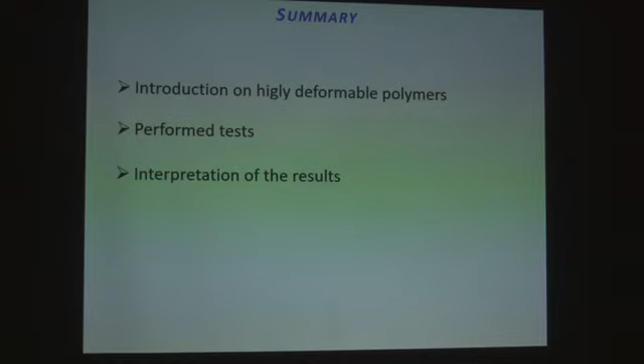In our research, we have studied the fracture toughness of highly deformable polymeric materials. A brief summary: I start with an introduction on highly deformable polymers, then the performed tests and the interpretation of the results. As we know, highly deformable materials have a high fracture toughness due to their great deformability.

In this research, we present the results of some experimental tests performed on specimens made of a common silicone-based polymer. This material is adopted in several industrial applications, like biomedical, but it was chosen because it represents a class of material.

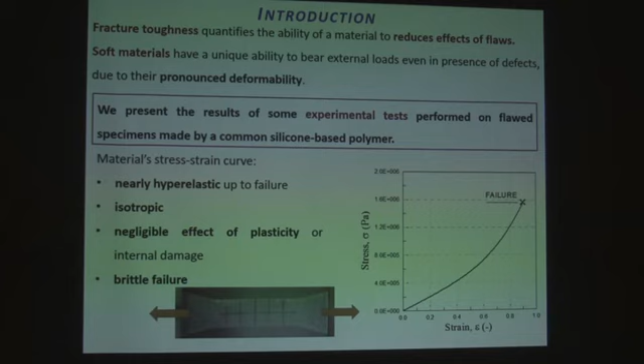The material, before the other tests, was characterized by a simple traction test that showed the elastic behavior, which is nearly hyperelastic up to failure, with an increasing of the stiffness with the increasing of strain. The material is isotropic, and the effect of plasticity or internal damage is negligible. The failure is brittle.

As we know, the crystalline material has an enthalpic elasticity, so the elasticity is ruled by the internal energy of the crystal. A polymer is made of a network of long molecular chains linked together, and the mechanical behavior is ruled by the entropy. In this general equation, the internal potential energy is related to the entropy variation and the temperature. So, the polymer network is always in a state of thermodynamic equilibrium. For example, this is the constitutive equation derived from this one for a neo-Hookean medium.

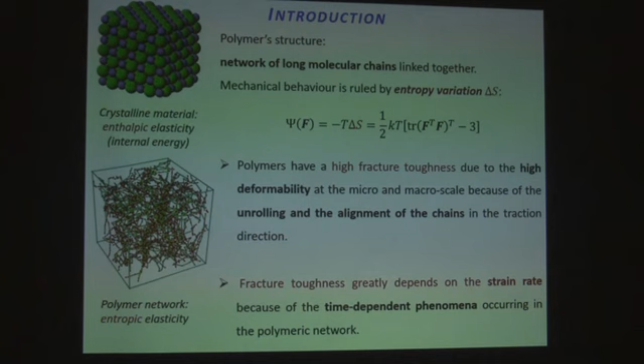Polymers have a high fracture toughness due to the high deformability, because the chains are rolled together. The elasticity is due to the unrolling of the chains with a subsequent alignment in the traction direction. This process takes time, and so the fracture toughness depends on the strain rate, because this process is a time-dependent phenomenon.

Failure of the polymer can be interpreted with the so-called cavitation criterion. Following this criterion, we assume the presence of intrinsic microspherical voids embedded into the material, and the voids are subjected to an internal pressure equal to the hydrostatic stress at the same point of the material. The failure occurs when a critical value of this pressure is attained. When this criterion is fulfilled, we have an unstable inflation of the void, causing a brittle failure.

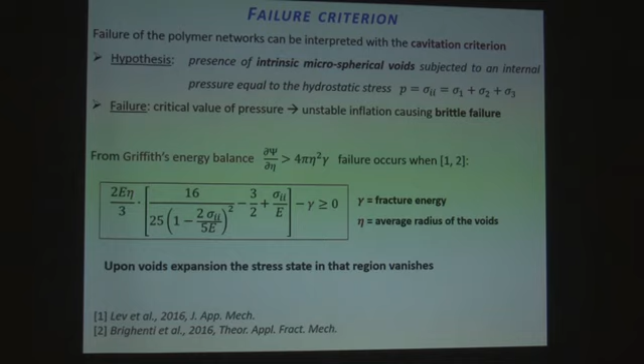The criterion can be written in this way, where it depends only on the fracture energy, the average size of the void, and the hydrostatic pressure. When the void is expanding, the stress state in the region vanishes completely.

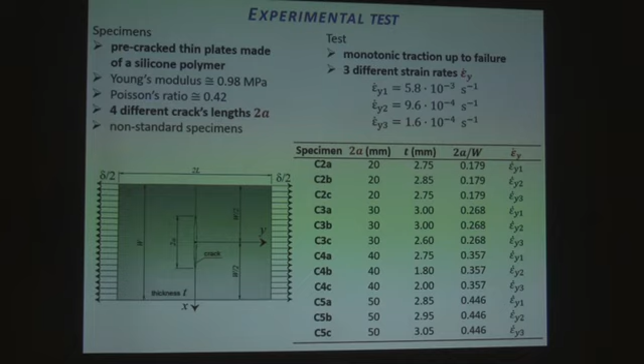The experimental tests we have performed were on these non-standard specimens. The specimens were pre-cracked thin plates made of this silicone polymer. We tested 4 different crack lengths and 3 different strain rates. This is the complete table of the tests. During the test, we observed in the thin plate the out-of-plane displacement of the regions above the crack, as Professor Bolzoni showed yesterday.

This phenomenon is due to the instability closure of the transversally compressed zones. And we can also observe the blunting of the original crack tip, and the blunting becomes more evident decreasing the strain rate. Also, four new crack tips, or directions of the tip, appear during the load process. The observed failure mechanism is brittle.

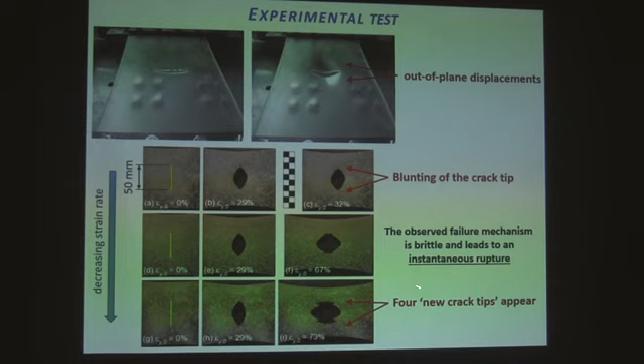These are several Green-Lagrange strain maps obtained from digital image correlation for the 20 mm and the 50 mm crack at two strain rates. We can observe the gradual magnification of the stress in a region, not only near the crack tip, but in the region. And these are the crack paths highlighted after the complete rupture of the specimens.

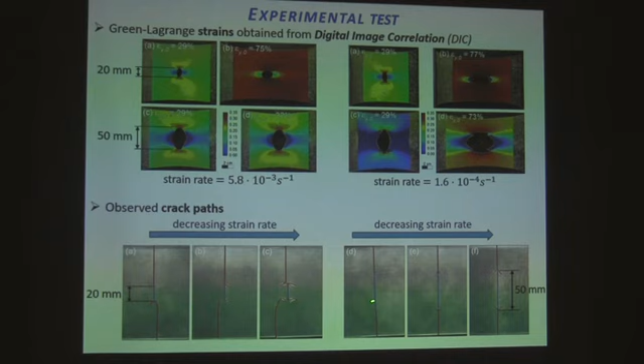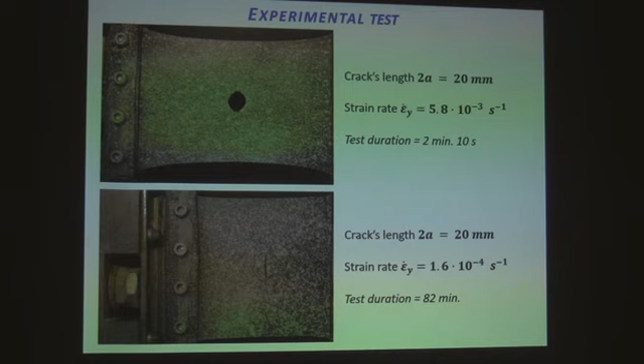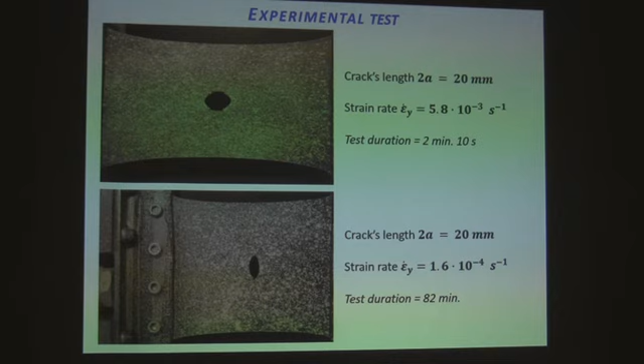We can see that for an increasing strain rate, the crack path is not perfectly straight, but has an initial curve. So in this case we are in a mixed mode, and in this case a pure mode 1. Here we have two videos only for showing the advance of the test. You see the blunting of the tip and the 4 new tips. And in this case, which is the slowest, you see the same phenomena.

I'm sorry for the motion of the camera. I'm not a great camera operator.

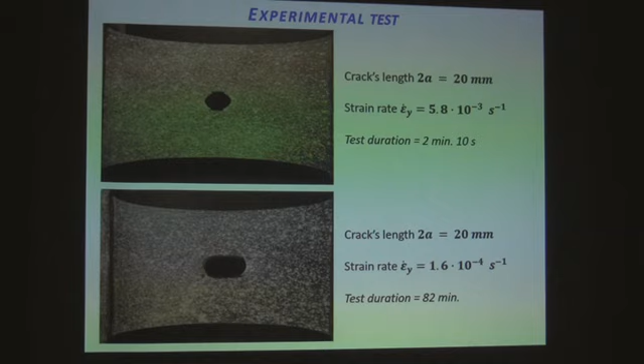At the end you see the great deformation. This one is the fastest test, and this one the slowest. We can see that the failure starts from this point.

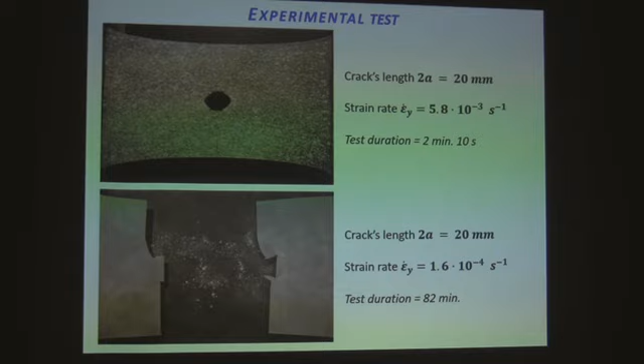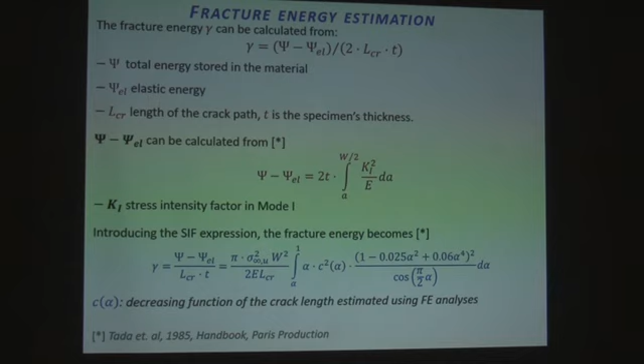The fracture energy of the specimen can be calculated from this simple expression, in which at the numerator we have the total energy spent for the rupture, and at the denominator the total crack area. This term can be calculated from this simple expression, in which only the stress intensity factor in mode 1 appears. Introducing the stress intensity factor expression in this formulation, we obtain the last equation, in which appears this function we have introduced. It takes into account the reduction of the remote stress during the fracture propagation, and it is estimated using several finite element analyses.

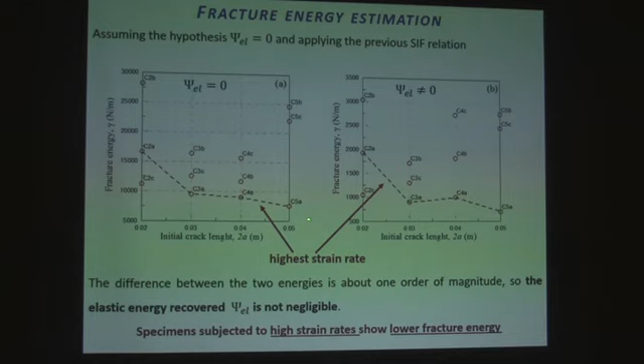We can see the results of the calculation. In these two cases, we see for all the tested specimens the fracture energy calculated assuming these two hypotheses. In the first, we assume the recovered elastic energy was equal to 0. And in this case, it was calculated using the previous expression. We can see that the difference between the two cases is about 1 order of magnitude. So the elastic energy recovered is not negligible. Also, we can see that for the high strain rate, the fracture energy is lower.

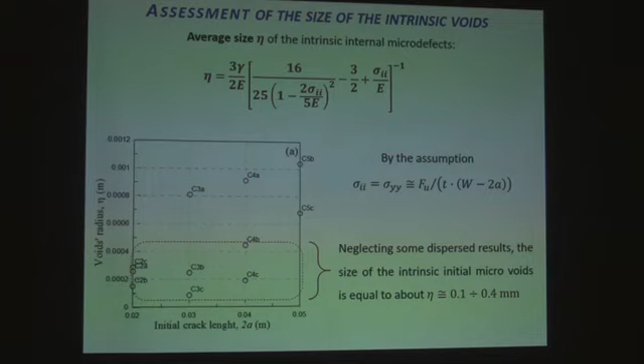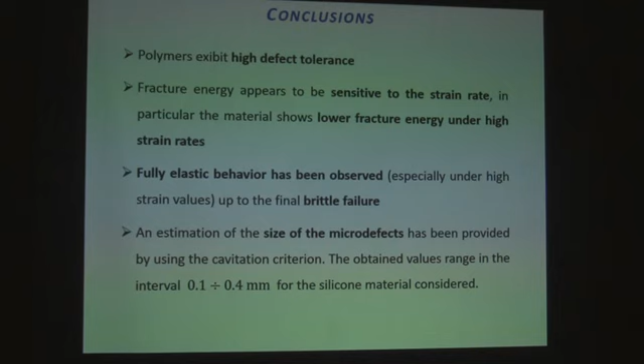In conclusion, we have observed that polymers exhibit high defect tolerance, and fracture energy appears to be sensitive to the strain rate; in particular, the material shows a lower fracture energy for high strain rate, and the full elastic behavior has been observed in the material up to the final brittle failure. We have also provided an estimation of the size of the micro defect using the cavitation criterion, which is a common criterion.